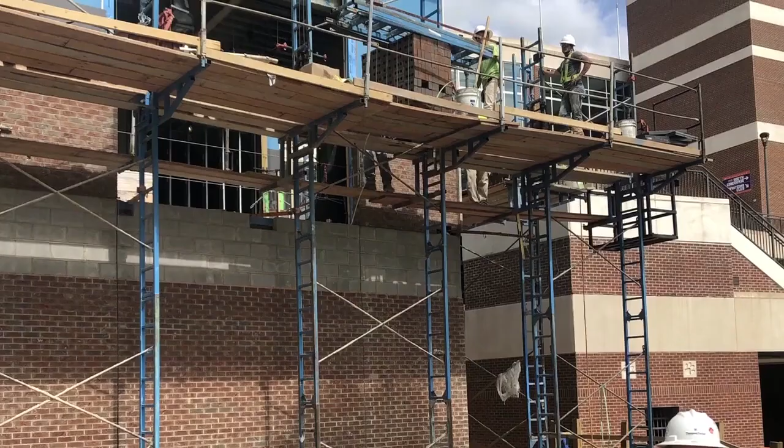If someone approaches you to discuss safety, remain open-minded. We believe that every employee is a valuable member of the team, and our mission is to ensure that every person who steps onto our site will work safely and go home each day free from injury. Taking chances or risks concerning safety is not acceptable. Our work is never so urgent or important that we cannot take the time to do it safely.

Working safely is the minimum standard to continue working with Thompson family of companies. We are proud of our excellent safety record, and we know that you will be an active partner in making it even better.

As a subcontractor to Thompson, you must remember that safety is our number one priority. This site safety orientation is designed to inform you of certain requirements while you are on this job site. These requirements are not designed to cover every aspect of your work while you're here and does not meet your OSHA-required training. This is simply the minimal safety requirement needed in order to perform your work at this site.

There may be additional OSHA requirements and training that pertain to your specific work that you're required to follow as you perform your job. If you have any questions or concerns about this orientation, you can ask any member of the site management team.

All non-English-speaking workers must be accompanied by an English-speaking interpreter or have an English-speaking person in their crew.

On behalf of the corporate safety team, I want to welcome you to the Thompson family. We don't use that word lightly, family. Because you're our team member, we want to take great care of you.

You're going to watch a series of basic safety orientation videos that should prepare you for the risks that you could encounter on our job sites. In the past, you may have watched videos similar to this, but please remain engaged. Don't tune out. This is important information.

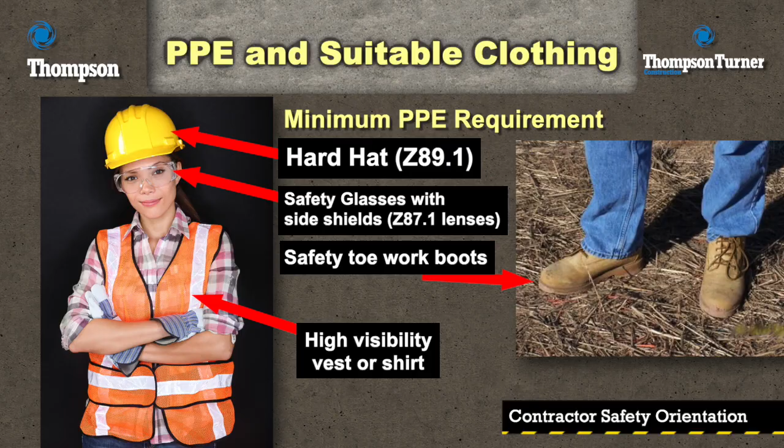Personal protective equipment and suitable clothing. The minimum requirement for this project will be hard hat, safety glasses with side shields. This includes prescription glasses. Safety toe work boots are required while on the job site. No tennis shoes or open-toed shoes. A high visibility vest or shirt must be worn at all times while on the project.

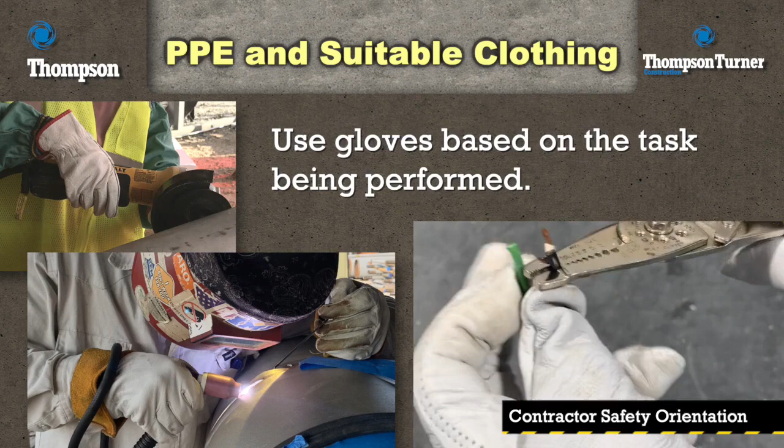Hands are one of the most important parts of the body, and they need to be protected. You should use gloves based on the task being performed. Some of the hazards include rigging, working with steel, sharp edges, and concrete work. Plan your hazard assessment of required gloves with your PTP.

Clothing should not have any questionable or controversial language or pictures. No shorts, no tank tops, and no sleeveless shirts. Shirts must have a minimum 4-inch sleeve.

Respiratory protection. If a respirator is required, the contract company must have a written program that complies with the OSHA standard, and it must address these requirements for all fit testing, medical surveillance, and training. All respirators used on the site must be NIOSH or MSHA approved.

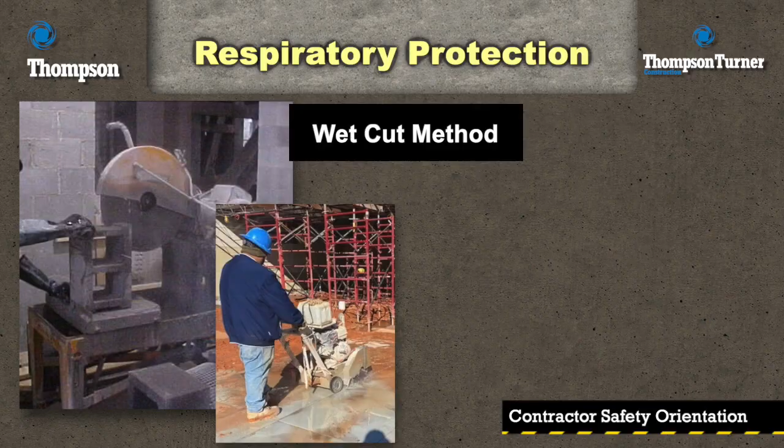All brick, block, and concrete shall be cut using the wet cut method. A face shield, hearing protection, and the appropriate level of respirator protection for the material being cut is required.

Falls are the leading cause of fatalities in the construction industry, so it is important to follow these specific safety requirements. In the Thompson Turner division, tie-off is required at 6 feet or higher. In the industrial construction areas, tie-off is required at 4 feet and above. You must have a safety harness and must be 100% tied off.

Your anchorage point must be capable of supporting 5,000 pounds. Harnesses must be inspected prior to each use. Retractable devices are highly recommended below 18 feet.

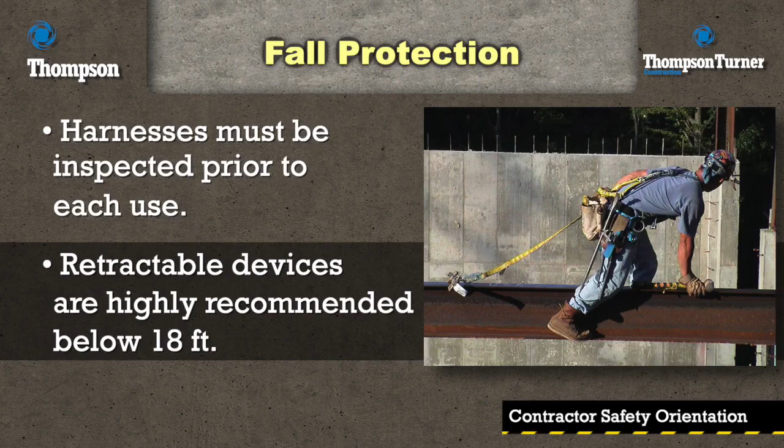There are many forms of fall protection: guardrails, warning lines, and safety monitors on roofs. It is your company's responsibility to ensure that employees have been trained and the correct fall protection is used for the work you will be performing.

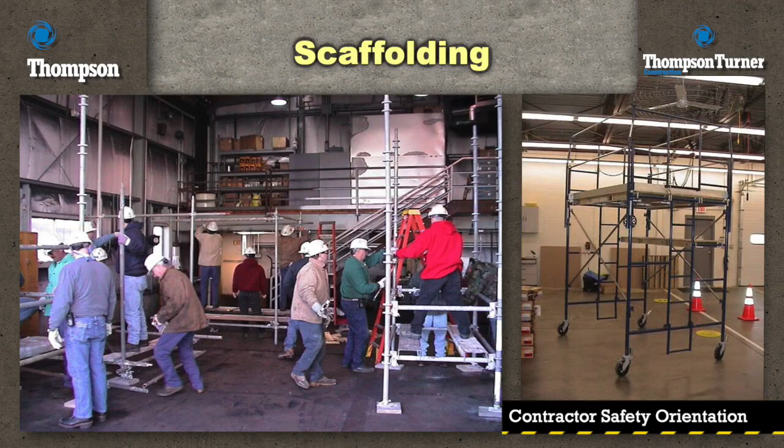Scaffolding. Scaffolding shall be built in accordance with OSHA Regulation 1926.450, Subpart L, and under the direct supervision of your company's competent person, who must be on site at all times. All scaffolding must be inspected daily and signed by the inspector on the tag.

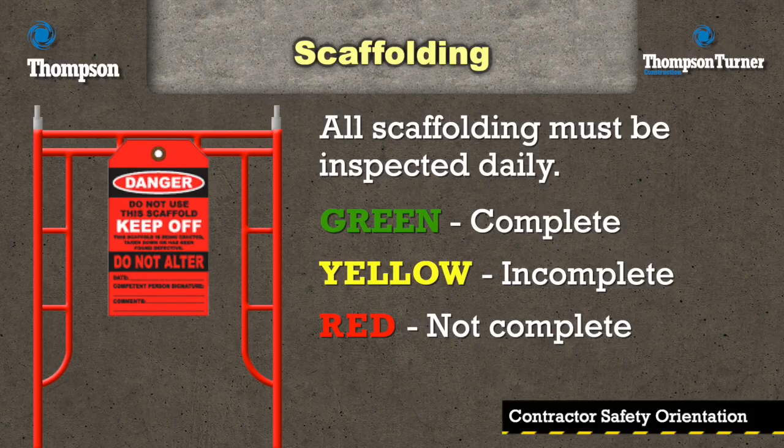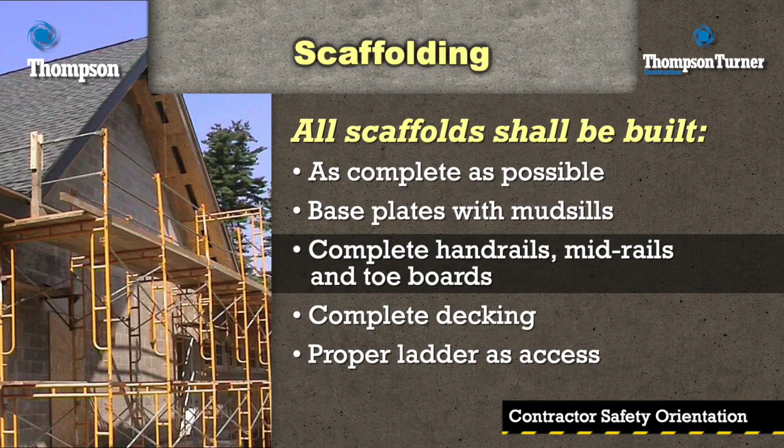If the scaffold is incomplete, it must have a yellow tag. Scaffolds that are not complete and not to be used are marked with a red tag. All scaffolds shall be built as complete as possible, including base plates with mudsills, complete handrails, mid-rails, toe boards, complete decking, and a proper ladder as access.

Housekeeping. A clean work area is a safe work area. Do your part in keeping your work area clean and safe. Pick up your scrap materials every day before you leave the job site. Trash cans and dumpsters will be provided to help in the cleanup process.

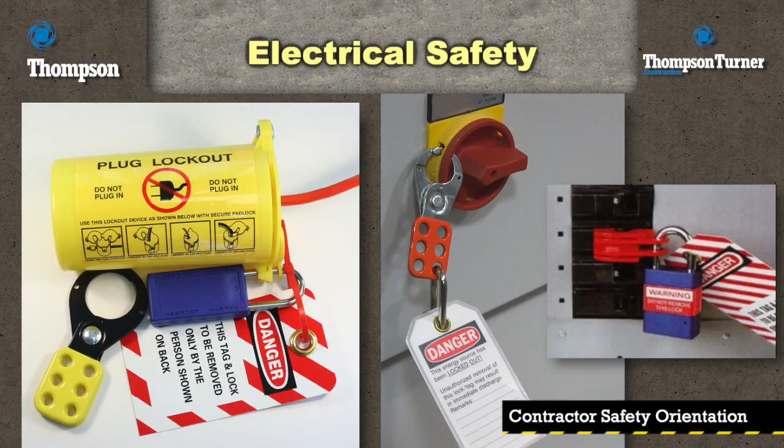Electrical safety. Prior to starting work on any electrical system, power must be secured and locked out. This includes working on all lighting systems. The system will first be locked out, then tested to make sure it has been de-energized by a qualified electrician.

Electrical rooms must be secured by means of a locked door. To gain entry into an electrical room, you can request admission from the electrical superintendent or site management team.

All electrical power tools, drop cords, etc., must be protected by a ground fault circuit interrupter and be free from any defects. Drop cords must be no less than 12/3 gauge. If any power tool or drop cord is found to be damaged, it will be taken out of service immediately.

Here is an example of a bad drop cord. It must be removed from the job site immediately. Also, the household 3-way splitter that you see cannot be used. Only construction-grade electrical devices will be allowed on site, rated heavy-duty or extra heavy-duty.

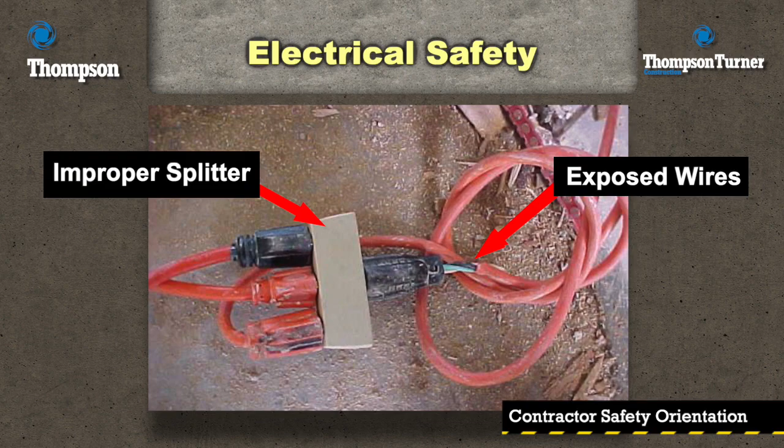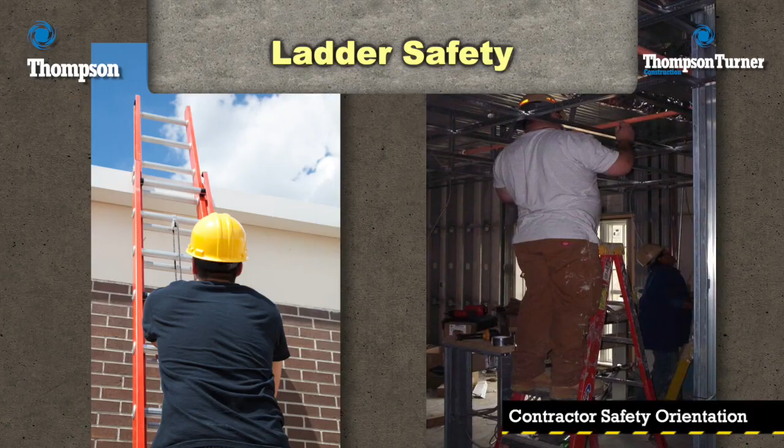Ladder safety. All ladders must be construction-grade work ladders and in good condition. If they are damaged, they will be removed from the project immediately. When using ladders, be sure to follow these safety tips.

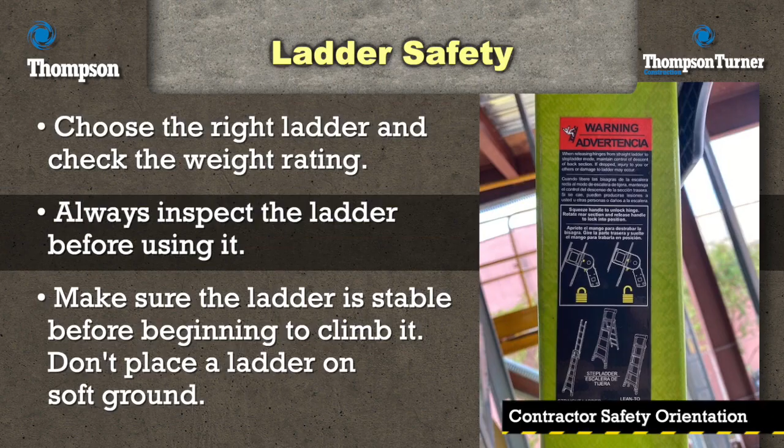Choose the right ladder and check the weight rating. Always inspect the ladder before using it. Make sure the ladder is stable before beginning to climb it. Don't place a ladder on soft ground. Make sure that you stay stable as you climb or stand on a ladder.

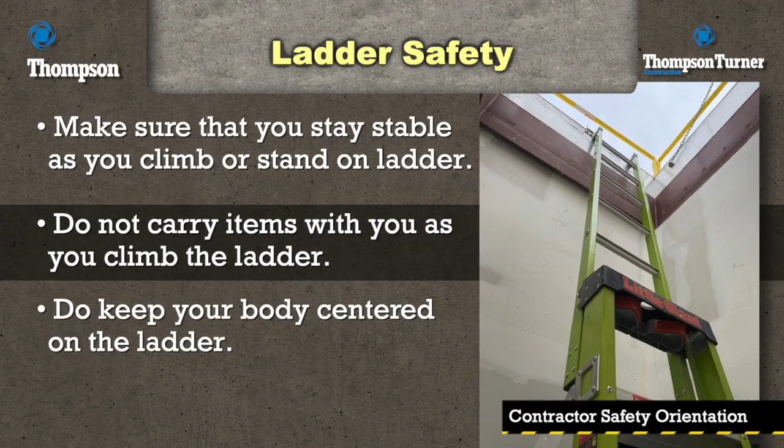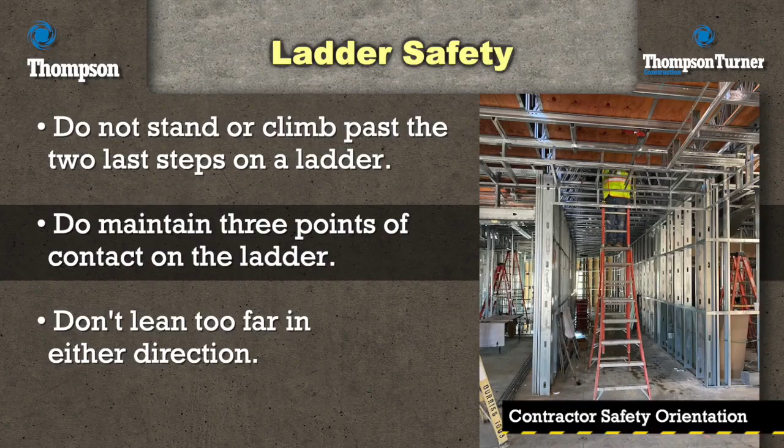Do not carry items with you as you climb the ladder. Do keep your body centered on the ladder. Do not stand or climb past the last 2 steps on a ladder. Do maintain 3 points of contact on the ladder. Don't lean too far in either direction.

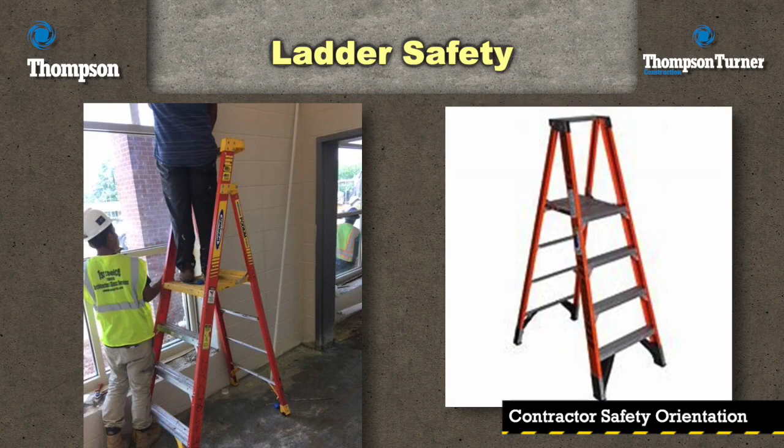When attempting to access areas where there are no approved anchorage points, which is common in the commercial construction environment, an employee and his supervisor need to look at all fall protection options, such as engineered guardrails at the top of ladder. Safety cages are fixed to adjustable fiberglass platform ladders with a built-in 42-inch guardrail.

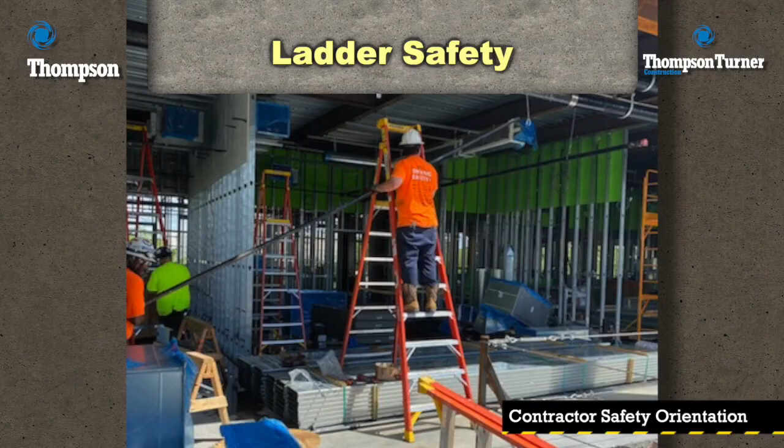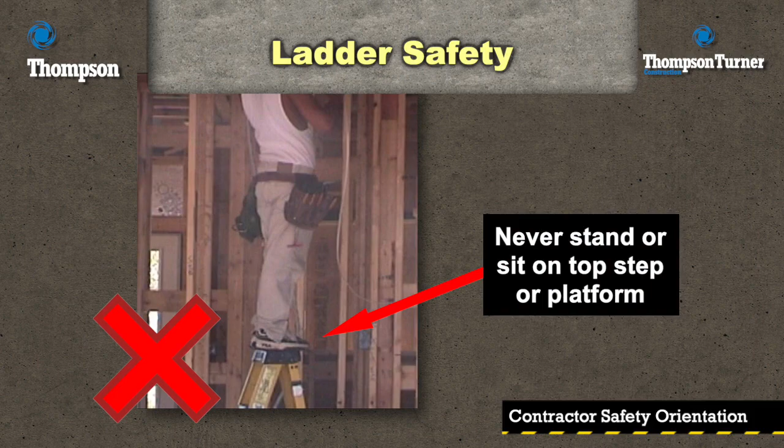When these ladders are used in accordance with the manufacturer's instructions, they can be another option in preventing employee falls. It is important that all ladders be used in accordance with the manufacturer's instructions and the OSHA standard. This is an example of the incorrect use of a stepladder. You should never use the top step or the platform to stand, sit, or work from.

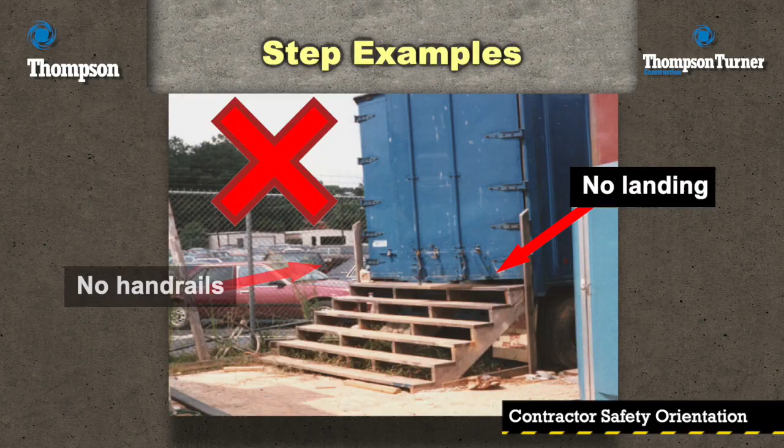This is an example of some bad steps with a storage trailer. These steps do not have handrails, and there is no landing at the top of the stairs for the swing of the door.

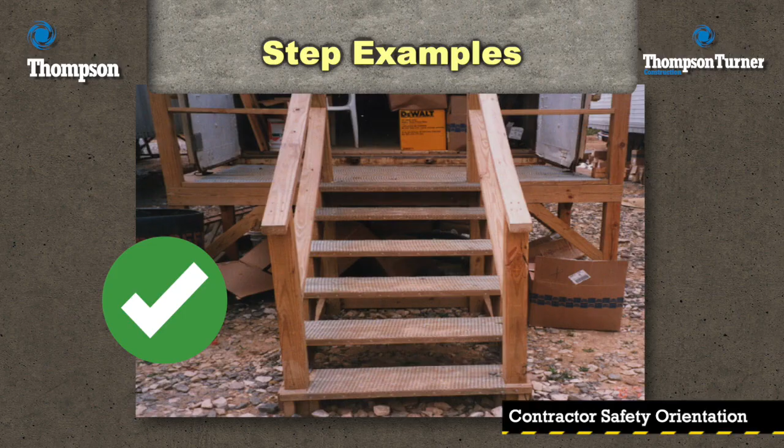The aerial lift. Every aerial lift must be equipped with an aftermarket control panel protection mechanism. Operators of an aerial lift must be trained and qualified on the equipment they will be operating. Documentation of the training is required.

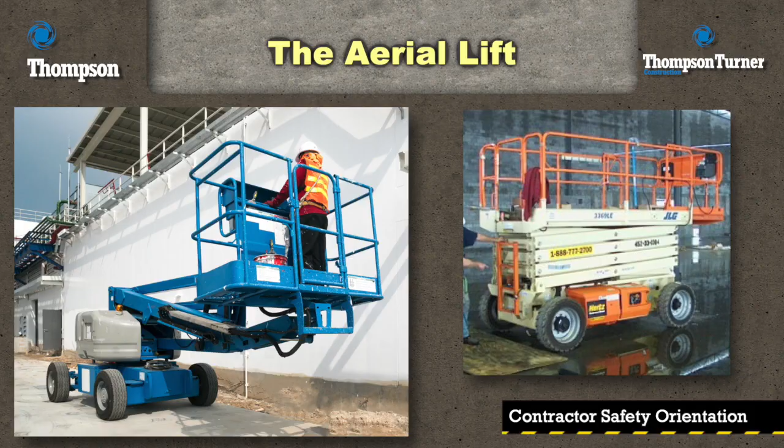A fall harness is required. A lanyard is required. And 100% tie-off in the aerial lift is also required.

Notice this worker isn't properly tied off. This lanyard should be attached to the proper tie-off point in the lift. His lanyard should not be tied back upon itself over a rail.

Make sure that you understand that you cannot use the handrails, the mid-rail, or any devices in the aerial lift to get to a higher location, including ladders.

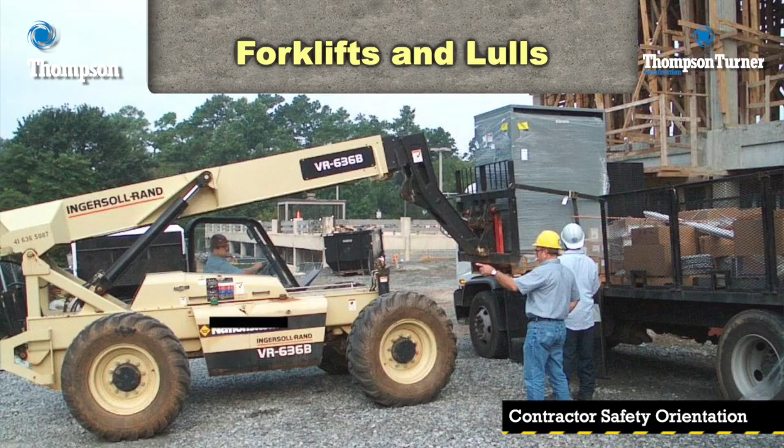Forklifts and lulls. All operators must be trained and qualified on the specific type of forklift or lull they are operating. Documentation of that training is also required during operation. Thompson operated and owned equipment like forklifts and lulls have a seatbelt safety switch.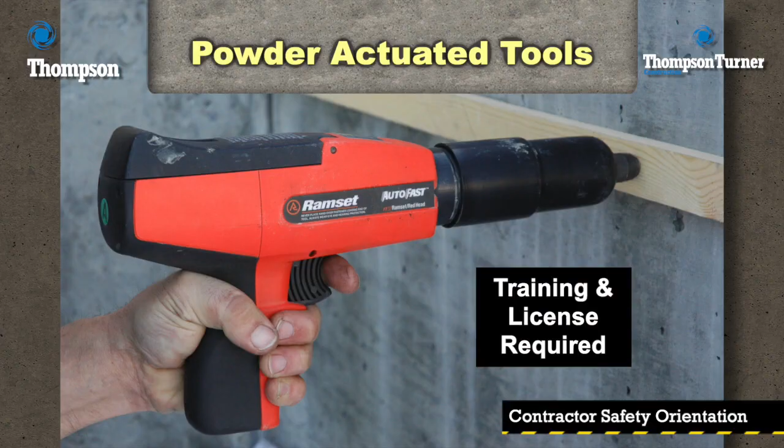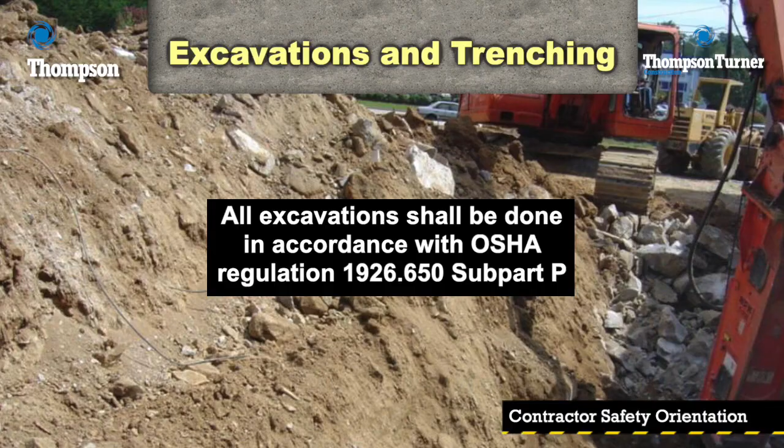All excavations shall be done in accordance with OSHA Regulation 1926.650, Subpart P, and under direct supervision of your company's competent person who must be on site during the excavation.

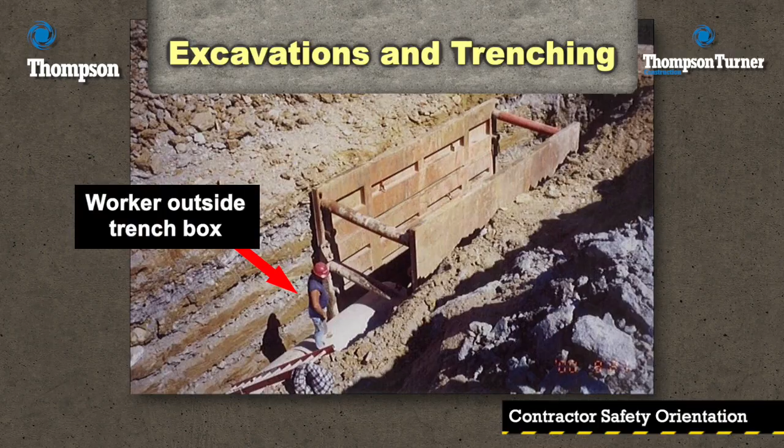Notice that the employee is standing outside the protection of the trench box and that the ladder is too far away from the trench box to be of safe use.

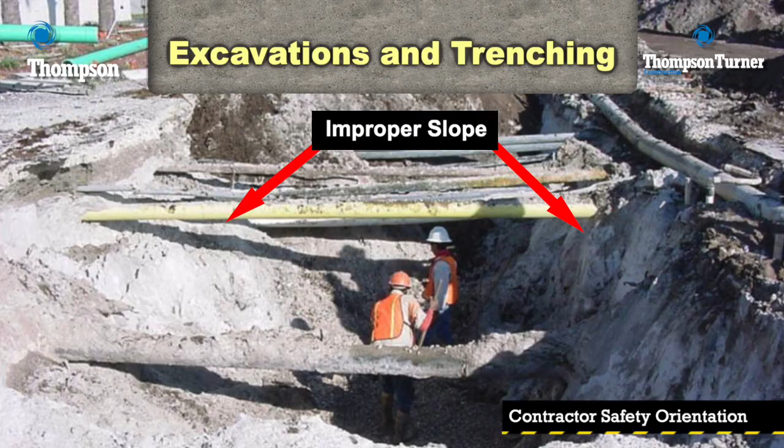Notice in the picture, the walls on this trench are not benched back or sloped properly, nor are the workers protected from cave-in. Also, the pipes are not properly supported.

It's unclear if the pipes contain caustics, acids, medical or sanitary waste, etc. Before proceeding with work, the content of the pipes must be determined and the appropriate level of protection provided.

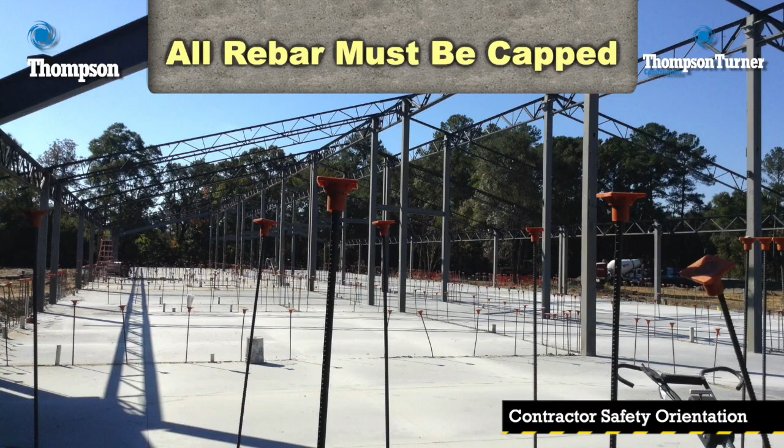All floor openings must be covered at a minimum with 3/4 inch plywood frame to fit the hole. The hole cover should be marked 'hole cover' and secured against movement. Depending on the hole size, additional support may be required to prevent collapsing of the cover.

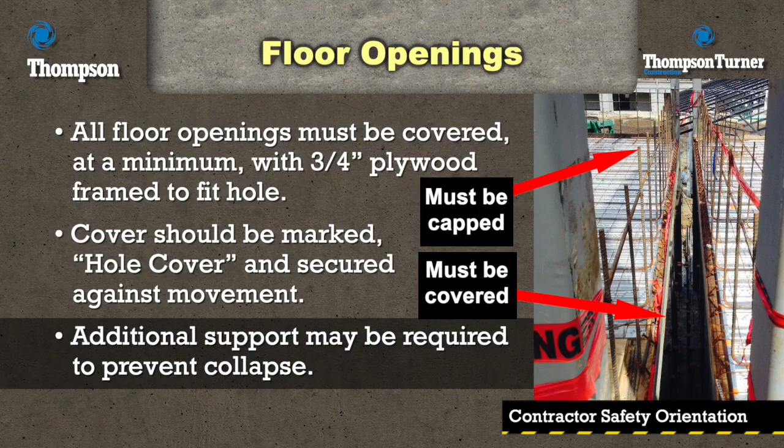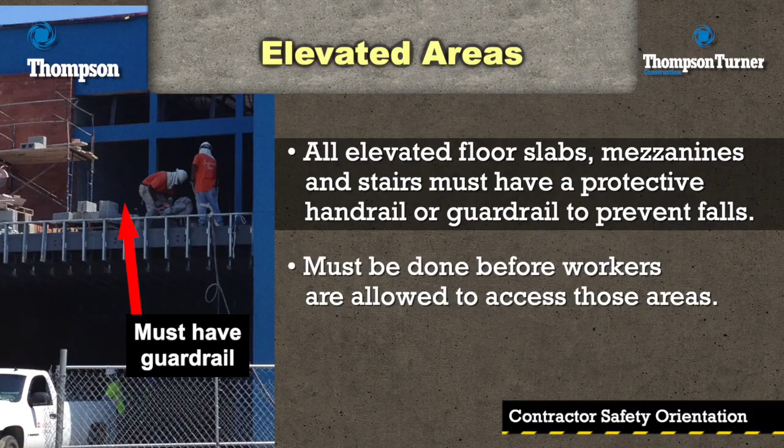All elevated floor slabs, mezzanines, and stairs must have a protective handrail or guardrail to prevent falls. This must be done before workers are allowed to access those areas. If you or your company removes or takes down a handrail or guardrail, you are responsible for putting it back up.

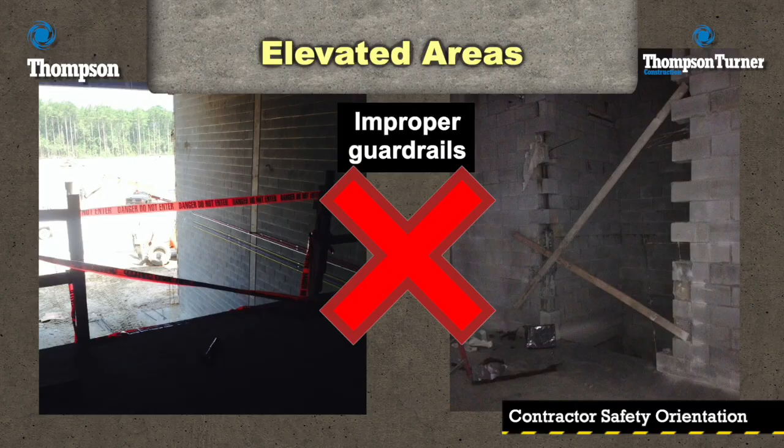Injuries and first aid. Employees shall report all accidents and near misses immediately to the supervisors. All contractors are required to provide first aid care to their injured employees.

First aid trained personnel and supplies shall be on site and available at all times. All contractors should report these incidents to the general contractor immediately.

Hazard communication. If you or your company bring any type of chemical on site, it must be properly labeled, and you must supply site management with the safety data sheet of that chemical.

Site management needs to have a full copy of your company's SDS book. This is to ensure we have the chemical's information in case of an emergency. Chemical labeling: you are required to properly label all chemical containers on the job site.

Substance Abuse Program. This program applies to all contractors, subcontractors, and tier subcontractors that will perform any type of work at this project location, and there are no exceptions.

All project personnel working at the project site are subject to random drug screenings. That drug screen can be performed at any time. This includes employees that may be on site for only a few days.

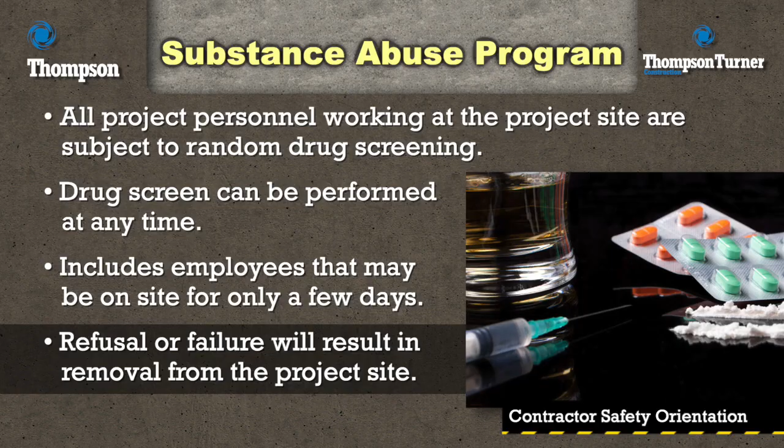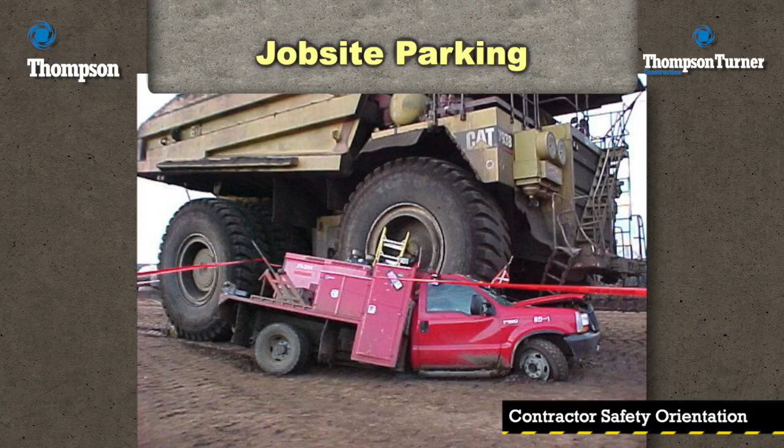If you refuse to take or do not pass the drug screening test, you will be removed from the project site. All construction-related traffic will enter through a designated control gate where there is a designated parking area for all contractors and their employees. No personal vehicles will be allowed outside the designated parking areas.

Smoking is only allowed in designated areas. Smoking is not allowed inside of buildings or on any school properties.

Radios and personal listening devices are not allowed on site. You cannot wear earbuds or headphones to listen to music while working. This creates an unsafe condition where it's difficult to hear what's going on around you.

Sexual harassment: any inappropriate talk, whistles, staring, or comments to students, other workers, or passersby will not be tolerated. Any of this conduct will result in your removal from the job site.

If you are working at an active school project where students and teachers are present, you should have no contact or interaction with those students or teachers. Any contact will result in your immediate removal from the project site.

If a situation develops where a student or teacher are in danger, their protection is of utmost importance, and every effort should be made to protect the student and/or teacher.

While everyone loves pets, the job site is not the place for them, and contractors are not permitted to bring pets to the project site.

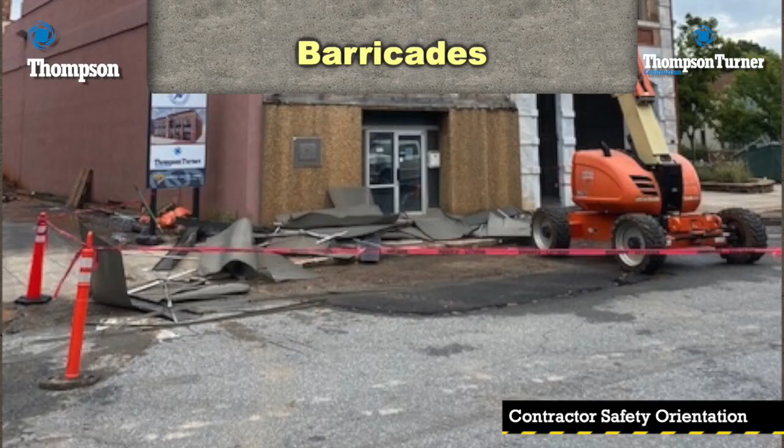Know when barricades should be erected, for instance, for overhead work or excavations and trenches. Know the difference between yellow and red barricades and when each is necessary. Confined spaces must be treated with caution.

There are non-permit and permit-required confined spaces. By definition, a confined space is one that, by design or configuration, has limited openings for entry and exit, is large enough for bodily entry, and which is not intended for continuous employee occupancy.

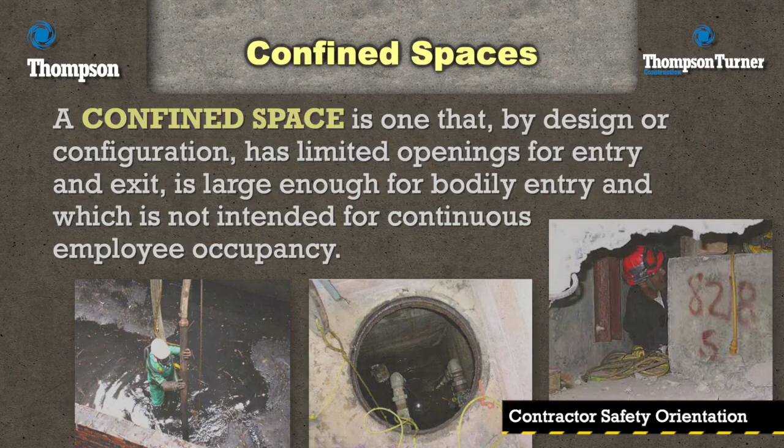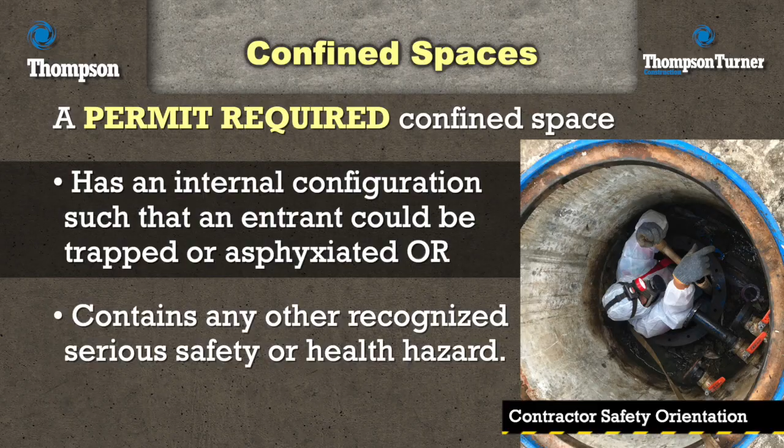A permit-required confined space meets all the requirements to be a confined space and has one or more of the following characteristics: contains or has the potential to contain a hazardous atmosphere; contains a material that has the potential to engulf an entrant; has an internal configuration such that an entrant could be trapped or asphyxiated by inwardly converging walls or by a floor that slopes downward and tapers to a small cross-section; or contains any other recognized serious safety or health hazard. If it is necessary to enter a permit-required confined space, you will need additional training, an entry supervisor, attendant, and a prearranged rescue crew.

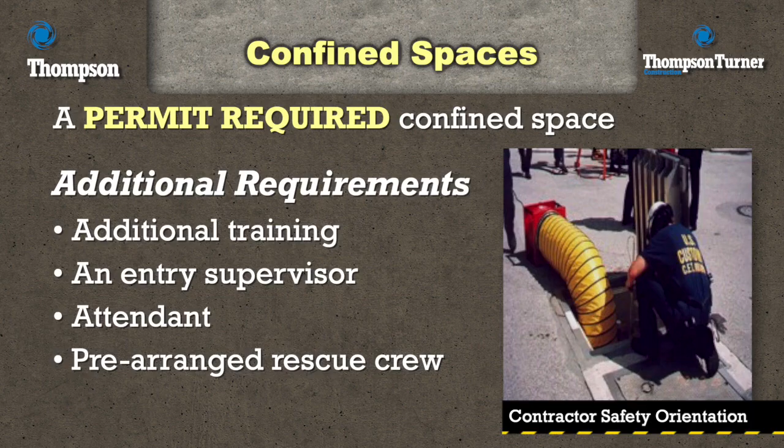Storm water pipes, manholes, sanitary sewers, and lift stations are all considered permit-required confined spaces.

All hot work involving burning, welding, cutting, open flame soldering or brazing will require a fire extinguisher within 20 feet and a trained fire watch that has no other duties. The fire watch must stay a minimum of 30 minutes after the hot work has stopped. All combustible material shall be removed before starting any work activities.

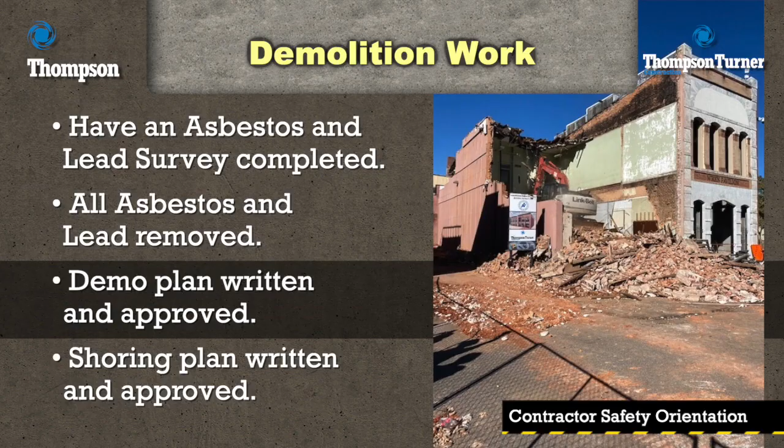All demolition work must have the following: an asbestos and lead survey completed, all asbestos and lead removed, a demo plan written and approved, and a shoring plan written and approved. Any site-specific safety plans will be covered by the site leadership performing this orientation.

In case of an emergency, all contractors must report to the site construction trailer or site-designated rally area, where they will then report to their site supervisor or foreman. The site supervisor will then make a head count and report to the site leader.

We believe that the people who do the work every day can best tell us how to work more safely. That's why we created the Site Safety Steering Team. It's basically team members from the site that will get together on a regular basis to discuss safety opportunities.

Now, it could be that they want to share a best practice across our organization. We love a great safety success story, or maybe they've identified an issue. If that's the case, we'd love to give our site leadership an opportunity to solve that issue. If it can't be solved at the site level, then it moves to the division level, and if it can't be solved there, it moves to the executive steering team.

Now, the whole point of these steering teams is to make sure that people at every level in our organization have a voice and have an opportunity to improve our safety outcomes. Remember that safety is our number one priority. Our work is never so urgent or important that we cannot take the time to do it safely. And if we cannot do the job safely, then we do not do the job.